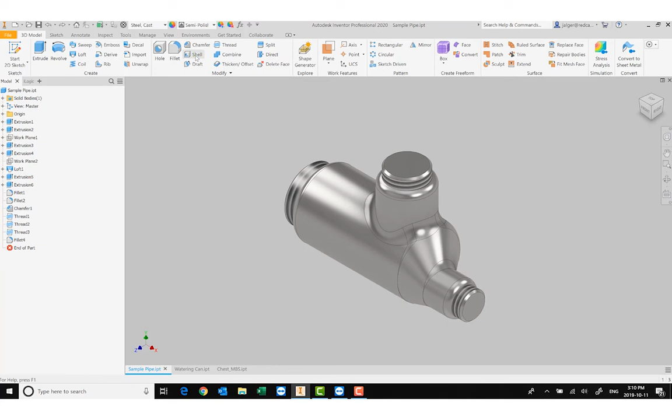So what I'm going to do on this first one is just a very standard shell, so I'm not going to change the thickness at all there.

What I do want to point out, however, is that when you select the shell command, if it shows you a red ghosted out image inside, that indicates that it's actually going to be able to create that shell for you. If it does not change color, then it means that something is preventing it from shelling. Most often, it ends up being a fillet.

So just make sure you go back through your features at the side here, and you can kind of roll it back one by one if you need to, by moving that end of part marker up.

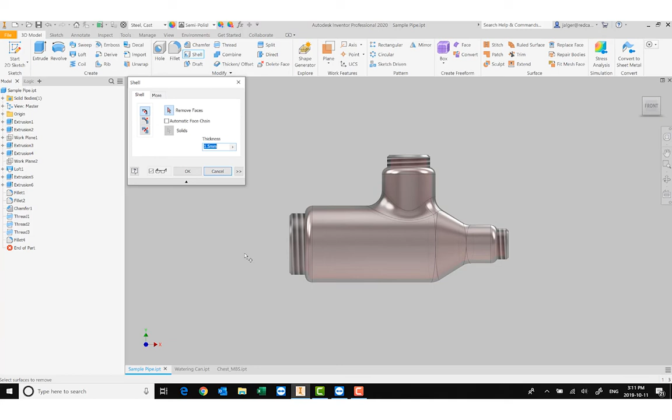However, in this particular case, everything is good, so I am going to go and simply remove the faces. I'm going to click on this one, click on this one, and on the other side here as well. And we'll hit OK. And what that does is it creates a beautiful shell inside of that pipe.

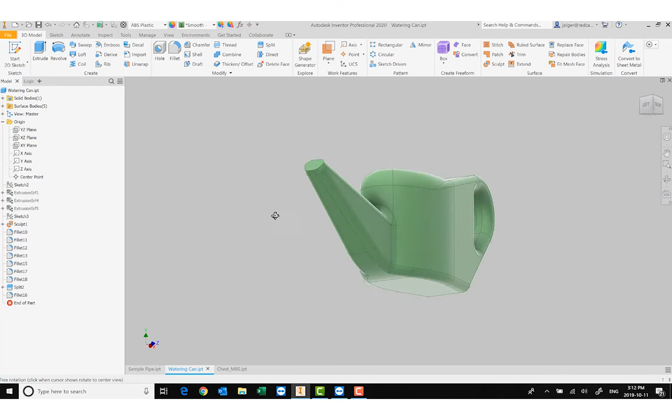Alright, moving on to the water can. So in the water can here, this is actually made of plastic. Let's assume that in this particular case we want to strengthen the bottom a little bit just to make sure that it can withstand the weight of the water that would be put inside of here.

Now you can also take care of the sides as well. I am just going to go and take care of the bottom because I know that that will work nicely. And then if you wanted to, like I said, you can just add in other surfaces as you're going.

To do this, we are going to click on the shell command. I'm going to remove the faces, so I'm going to remove the circle at the top here, and I remove the spout there so that we have somewhere to pour the water out of.

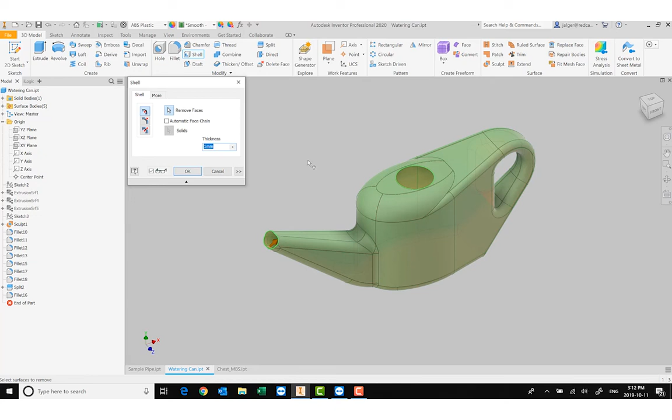And to add a unique thickness here, what we're going to do is look for the double arrows here. We're going to click on the double arrows, expand it, and inside of here you can see that you can assign unique thicknesses. Now you can actually set more than one, but in this case I'm just going to set just the one.

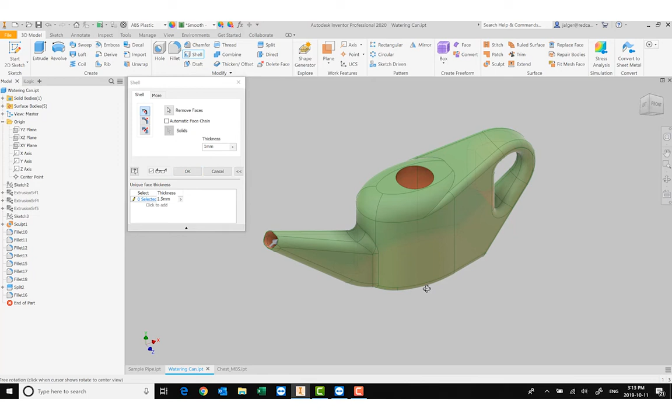So I'm going to click on there. I'm going to change the 1, which is the default thickness from the model, to 1.5. And then I'm going to select the faces that I wish to strengthen. So click on this, and then we'll click on the bottom here, here, here.

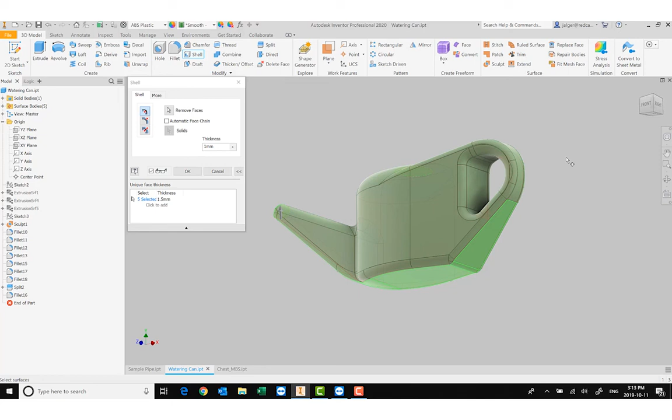Rotate around here, grab this one and this one. If I click on something else that causes it to fail, it goes to a solid color. Remember how I said earlier, if you lose that red ghosted image, it's not going to solve properly. This would be an instance where it would not solve properly. So I'm just going to remove that one by holding Shift and clicking on it to deselect it, so I don't have to restart the command. Now that I've done that, I can hit OK.

And we get a nice little spout inside of there. You can also do the same thing by making it thinner. So if you want a little area for the water to easily travel through, you can do the same thing and make that thinner instead of thicker.

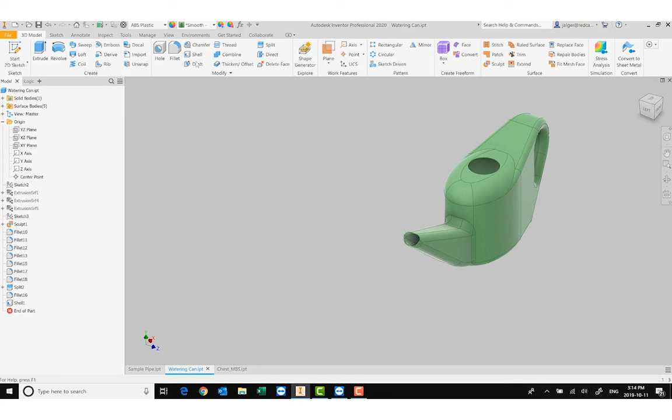Just so you can see the difference, I know you can see it on the spout, but so you can see it everywhere, I'm going to go to View and do a half section view. I'm going to choose one of my planes, in this case the XY plane, and accept it so you can see the difference in thickness there. Kind of nice.

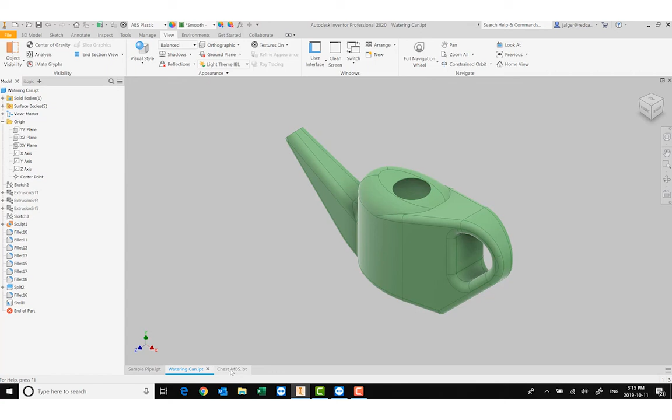Then to end that, you can always go back in here and say End Section View. I just ended the section view, and we're going to switch over to the chest here, the multi-body solid chest.

Now the multi-body solids are a little bit different. Normally, when you do a shell command, it will only allow you to have one instance of a shell. With a multi-body solid, you can actually have multiple shells within one part.

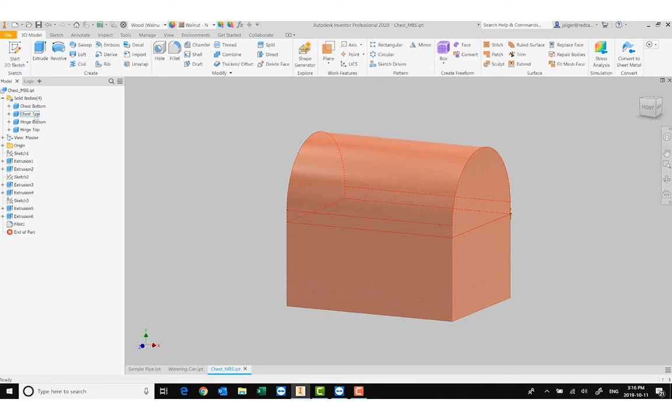I've gone to the chest here, and I have some solid bodies that are named. I'm going to temporarily turn off one of them so it's easier for me to select the faces. You could do this without turning off the actual solids, and you'll also notice that because we're doing this with solids, a new option appears in the shell command: the ability to select which solids are going to participate in the shell.

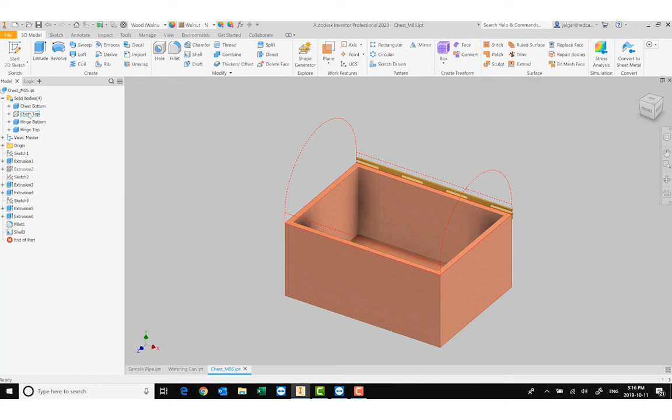In this case, I'm just going to do it for the bottom of the box and the top of the chest as well. So I'll do a half inch on the bottom here, then bring back the visibility of the top of the chest, remove the visibility of the bottom, so I can now see this one. I'll run the shell command again, and this time put my shell to 0.375, or 3/8, there. Select the bottom face, and there we go.

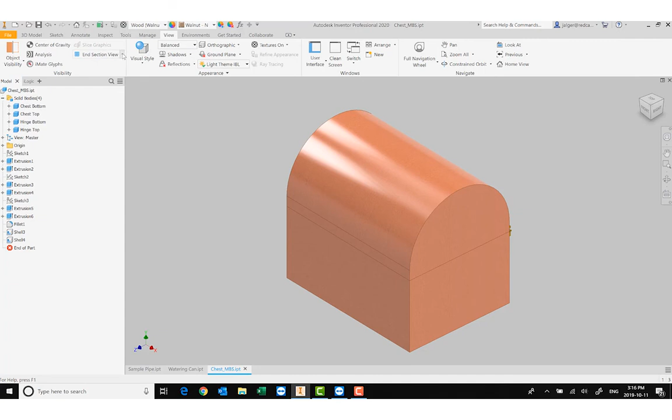It's nicely done. I'll now click on the visibility of both of them, and just like I did with the watering can, I'm going to do a half section view so you can see the difference in the thickness.

And that's on two separate solids. The nice thing about this is that you could then take these out to separate parts, which I'll do in a different video at some point.

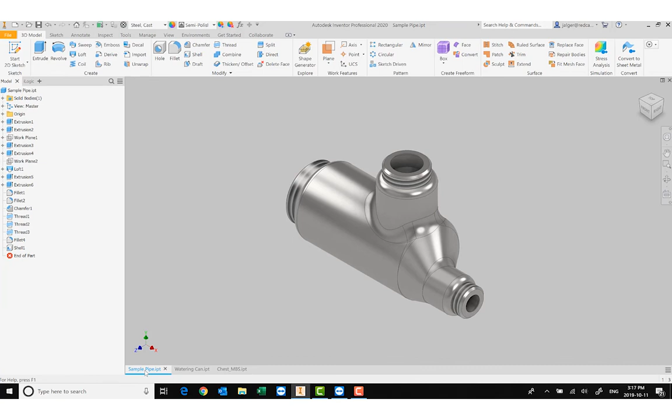Well, there you have it. There's all the things I wanted to quickly show you inside of the shelling environment: a regular shell, using it to apply a unique thickness on a face, and then applying it to multiple solids.